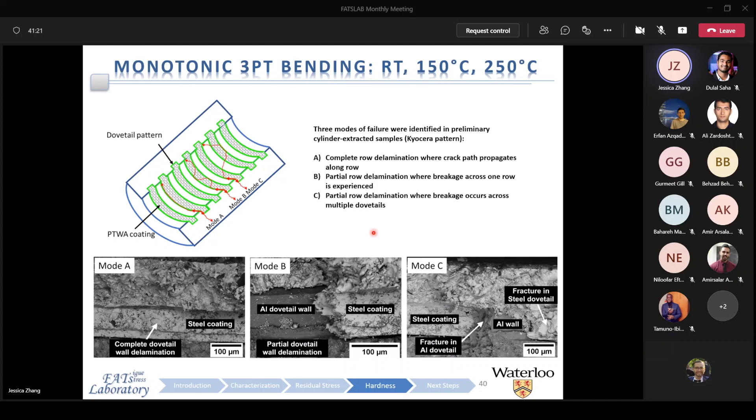Whereas mode C is delamination and breakage across multiple rows. So those were the three modes of failure that we saw pertaining, I think, to the W orientation more so. And generally, when we look at our flat samples, this is an image at room temperature. Generally, a combination of delamination and coating breakage is what we saw here, so modes B and C.

And more breakage was seen at higher temperatures. The higher temperatures also resulted in more breakage specifically at the interface; it was more prone to fracture. The failure in the H orientation modes A, B, C are not applicable, but the failure was dominated by delamination at the interface.

So while the room temperature and 100 degrees Celsius results were actually similar, the 250 degrees samples showed large degrees of separation. So I guess the difference in thermal expansion affects this particular orientation at higher temperatures a lot more. And we can actually see that.

So this is the A356H. At room temperature, the scale is a little different, but there's a little bit of separation. But at 250 degrees, it becomes quite prominent here for the A356H.

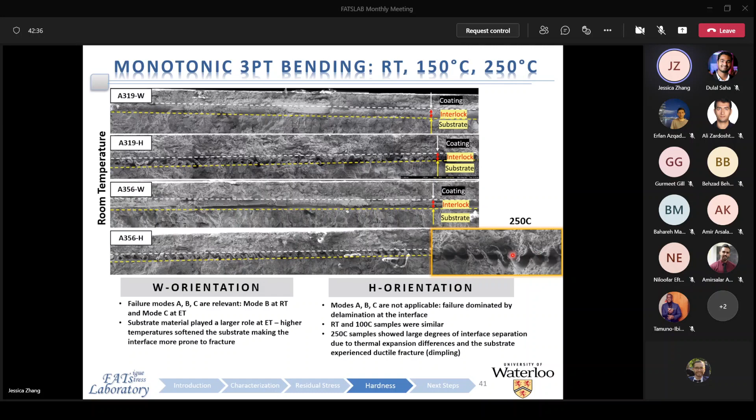Yeah, so that's all that I was going to share today. We do have a paper published that summarizes part A of our findings, that would be the microstructure portion. And we're currently working on papers for the pull test, the quasi-static bending, and then the cyclic bending. And I think Dulal is working on the fretting fatigue testing right now.

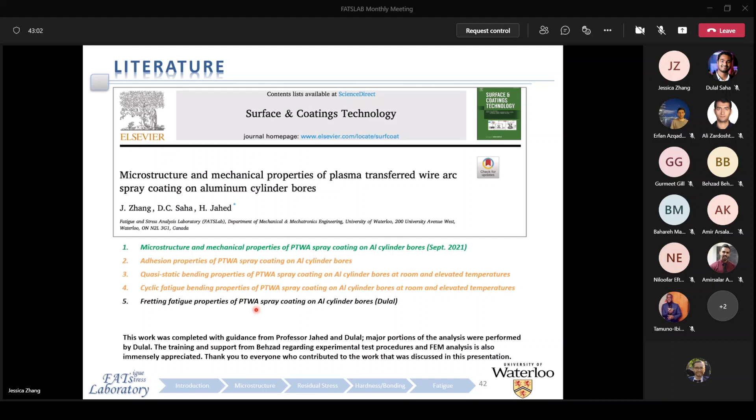Okay. Thanks for the clap. Thank you. Thank you very much, Jessica. It was a very nice and interesting presentation. I think it had a very nice flow and was also visually very appealing.

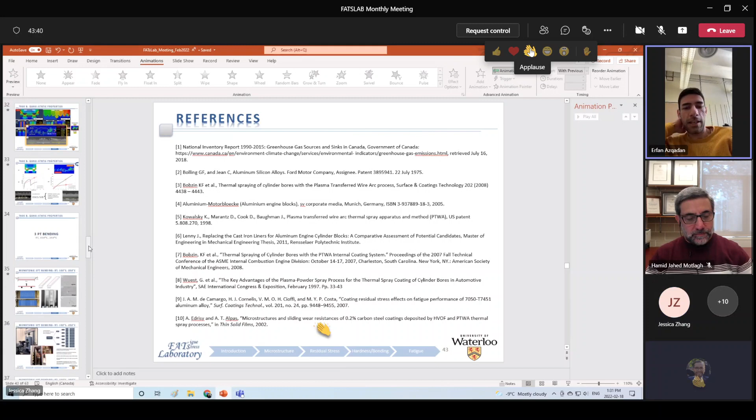Thanks. Okay, if there are any questions. I myself have a few questions, but my knowledge in coating is very narrow, so I will wait to see other questions. I might get my answers through other people's questions. So if there are any questions. Sure, I'll ask a question. Sure. Great presentation, by the way, Jessica. Very interesting. Just want to echo what Erfan said.

I have kind of a more philosophical, high-level question. It seems like a lot of the effort you have invested here is optimizing a combination of the mechanical interlocking, so the strength counteracting the delamination of the coating. And there's two parts of that: mechanical interlocking, so a mechanical attachment, and then a chemical bonding.

Can you speak to which one's more important in which situation? And maybe this might be hard to distill down to a percentage, but is there a percentage of the total bond strength that comes from the mechanical part and the chemical part? Is it simple enough to look at it like that, or is it a lot more complex?

That is a good question. I think our original goal, at least for the adhesion portion with the comparison between the finite elements and our experimental results, was to be able to subtract the mechanical interlocking that we saw in the model from the experimental results. But we also saw in our TEM study that we weren't able to identify any sort of intermetallics.

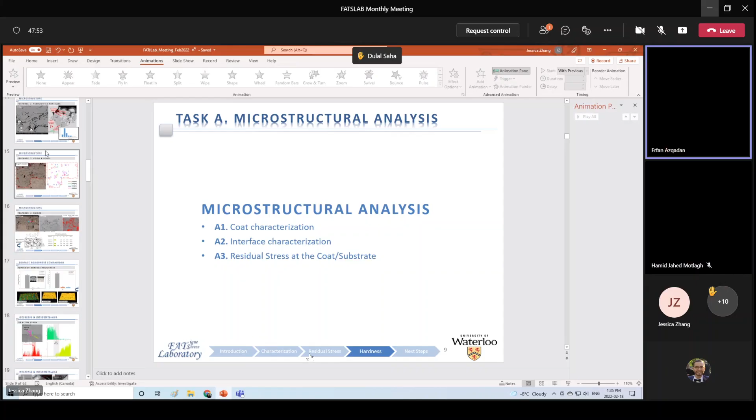Okay, let me ask one of my questions. Sure. You mentioned for one of your samples where this fracture initiates and what is the path of that. For different interlocking patterns that you have, is that different or do they show the same kind of initiation of crack and fracture? I think what I mentioned was slide number 32, around that slide. Or maybe you know better. Maybe you have that information somewhere else.

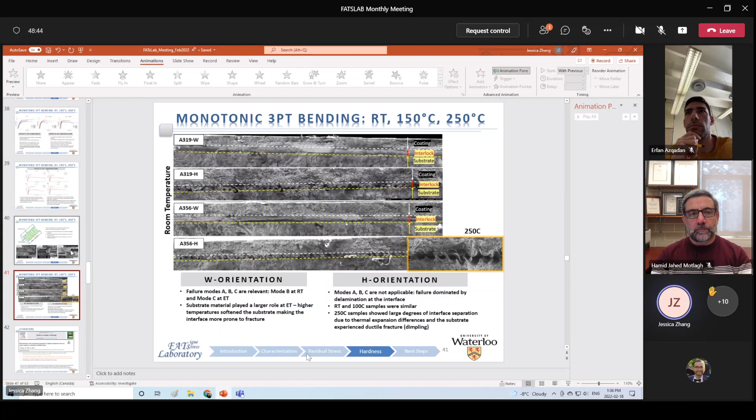Oh yeah, so this is for adhesion. I think we're talking about the fracture path for bending or adhesion. Anyways, regarding bending, I can answer that. When we did this preliminary study, all these samples were the dovetail pattern. But then when we did the second study, all of them were that wave pattern. So it's more so depending on the orientation. The failure path was very similar for both the patterns in the W orientation, whereas the H is different.

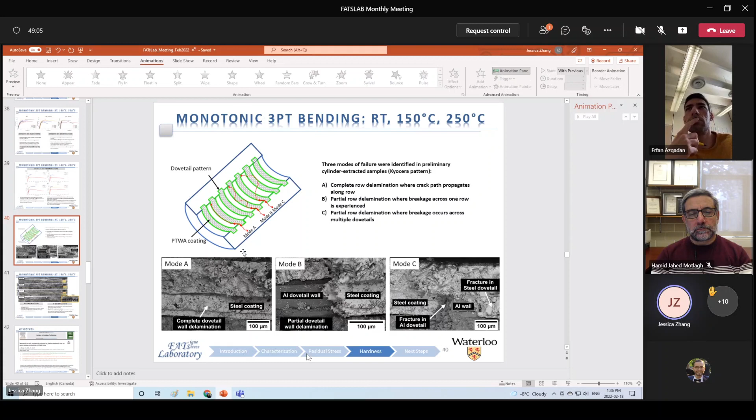One thing that we did notice in our initial tests was that there was a lot of breakage at the interface, specifically at these horizontal sidewalls, and we were really interested in seeing why that was. When Dulal looked at it using SEM, he saw a huge layer of resolidified particles that we weren't able to see because we were previously viewing it at this angle. So it really affected the amount of effective bonding that we can get in this pattern. So that would be the main difference between the two patterns. The failure path, not so much, but kind of the reason why it initiates here at the interface.

So what you mean is that the orientation is more important than the type of pattern, right? Yeah, in terms of affecting the failure mode. Yes. Okay, thank you. Because this pattern still has these kind of similar vertical sections.

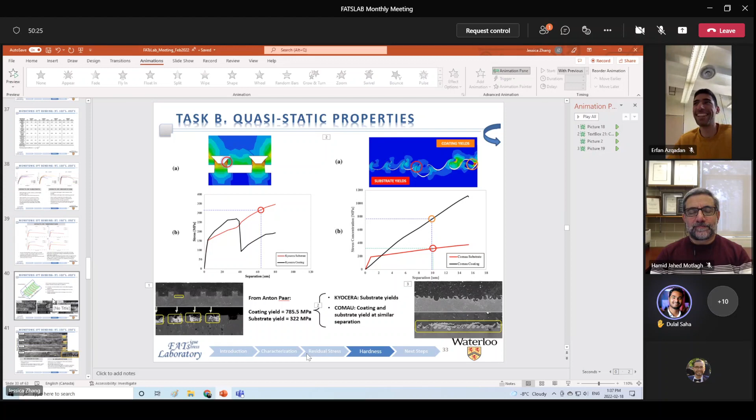Okay, it's Dulal. Actually, I have a couple of suggestions. I know quite a lot about this project; I'm involved in this project from the beginning. So just a couple of suggestions, and then I'll give some information to Andrew's question, whether the intermetallic is playing a role here.

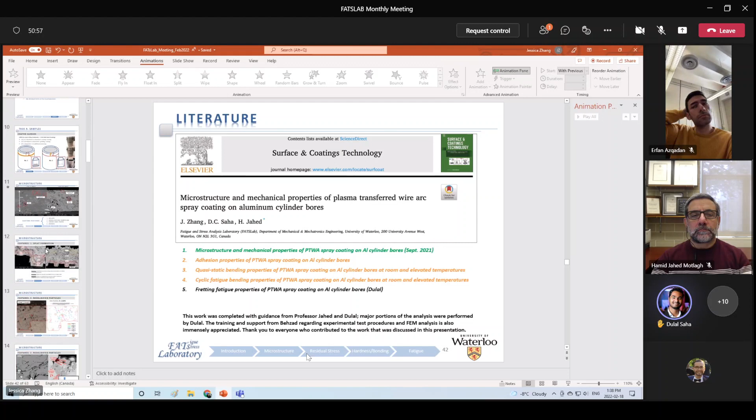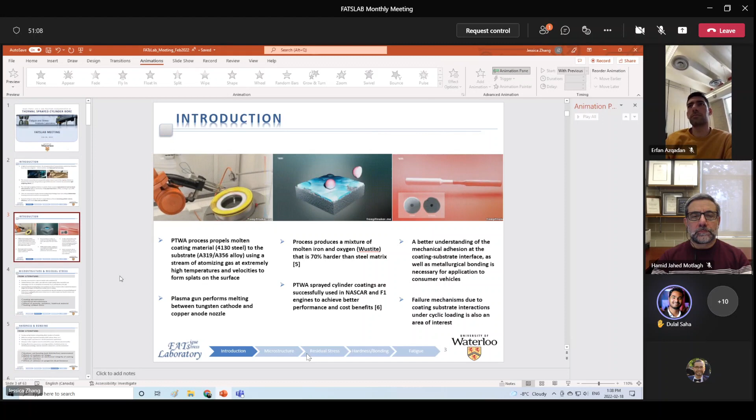For a general question, maybe in your introduction, if I'm not from this background, I'm missing what the PTWA coating deposition method is. Maybe you can just show where the interlock pattern is in the cylinder. Yes, okay. And what is the orientation of the interlock pattern? Because you are talking about W and H orientation, but if you are not in this background, then it will be hard to know what you're talking about. It's really hard to understand.

And for your microstructural part, you use a different pattern than your pull test and your flat sample. Probably you can highlight why you have done this study on this sample, and the rest on the other sample. Or, if possible, just use one kind of interface pattern to show the microstructure features, and then move into your pull test and 3-point bending test.

And also you can highlight that the oxide present in the coating is not degrading the mechanical properties of the coating, because oxide is needed in the coating and gives higher strength, like higher hardness. Some of us think if oxide is present in the coating, it's making the coating worse or degrading the coating strength, but basically not. Here oxide is needed to enhance the hardness of the coating to have better tribological properties. Okay. Sure. Yeah, that's really important to mention.

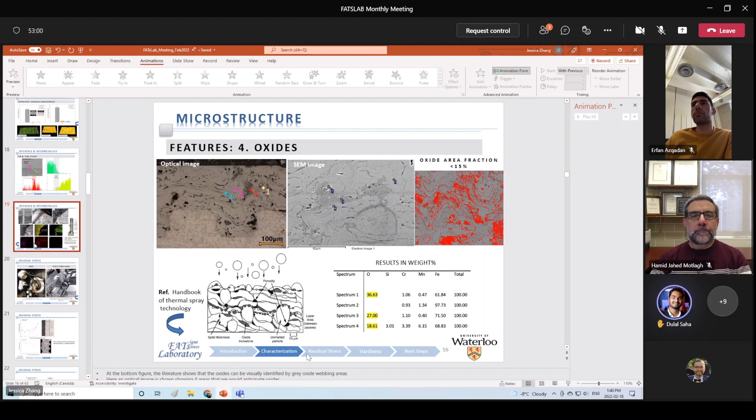I guess I didn't mention that the steel really does contribute to the strength of the coating, but it kind of does affect the failure modes that we see. Yeah, and to add on Andrew's question, there is some intermetallic present based on our discussion with our industry partner, a nano layer of intermetallic. They suspect maybe in the order of 5 nanometers. But when we initially started the TEM investigation, we didn't look into that nano level of the interface; instead of 5 nanometers, we looked at maybe 500 nanometers.

So we didn't actually find any kind of trace of intermetallic. Maybe the intermetallic layer was very much in the nanometer scale. That's one. And to identify what is the effect of the intermetallics or metallurgical bonding versus mechanical interlocking, we did the simulation, and we found the simulation result is quite matching with our experimental data, which suggests maybe by only mechanical interlocking we can have the strength we are obtaining from the full

test. And if there is any intermediate layer present, that has very minimal influence on the total strength of the coating. But obviously it is present. We can say there will obviously be a nano layer of intermetallic compound at the interface. Yeah.

Yeah, and I would also add that during our adhesion study, since we were able to view our samples from the fracture surface, we can also see the surface of the coating. And we found a kind of strange webbed texture, and Dulal did a little bit of a study on that to see if it does have the potential to be an intermetallic, though we're not so confident about that, so we cannot claim it as of yet. So. Okay, don't worry about it.

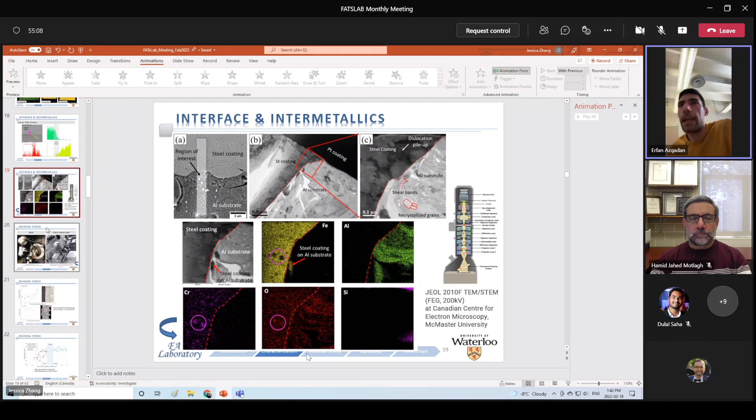Okay, I also have another question. Can you go to your slide 38? Yeah, here for this red one, A319W, between 150 and 250, it seems that's the only one that dramatically decreases its mechanical properties, if I'm not wrong. It seems that it is affected by the temperature a lot compared to the other one. Is there any explanation for that? Did you find anything like why that happens?

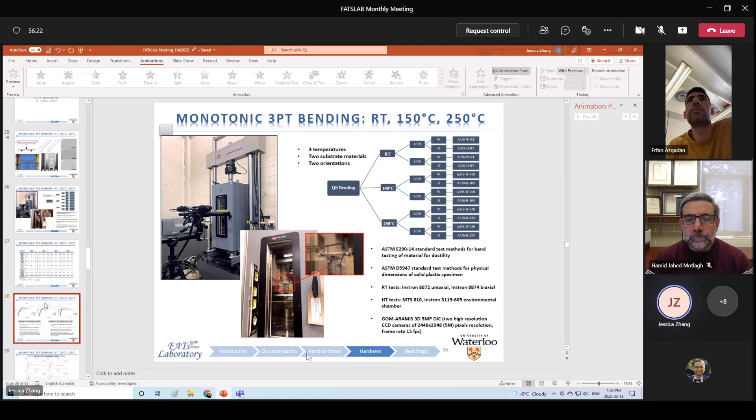We actually did see in some properties that the trends at 150 didn't really follow successively from room temperature, 150 to 250, but we are not quite sure yet why. We are also taking a look at the differences between the testing. As you see, we unfortunately had to use different test machines: for room temperature we used the 2 Instrons, and for the higher temperatures we used MTS for these 2. So I guess the trends, although you've noticed that the 150 doesn't quite fall in place between the room temperature and the 250. Yeah, that's also correct.

And the system is only aluminum and iron, right? Okay. So I don't think there is any intermetallic in this system that might be, for example, stable at 150 and not stable at 250. Any intermetallics would be stable until like 600. So, yeah, 250 is quite low. Thank you.

Thanks, Jessica, for the very nice presentation. May I have some questions and comments? Sure. First, some editorial or formatting comments. I'm sure that you will add that in your final version, but anyways, an outline up front and a conclusion slide toward the end of your presentation might be useful or maybe necessary. And the flow map at the bottom of your slide does not match with the slide subject. I'm sure that you will fix that in your final version anyways.

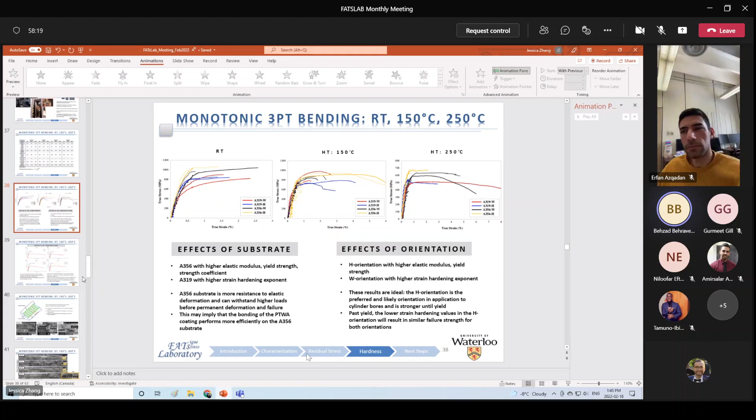Apart from those comments, my other comment is that I didn't see too much information about the literature in your presentation. In slides 4 to 6, I saw some statements, but you didn't go through those. I think the audience or your examiners would expect you to show that you are aware of what has been done in the literature and what conclusions they have made through their research. So you can present those in your earlier slides, or where you present your own results regarding the microstructure, intermetallics, residual stress, or other things, you can just point out what's available in the literature regarding those topics. I'm just saying that I couldn't find that information to the extent that I was expecting to see.

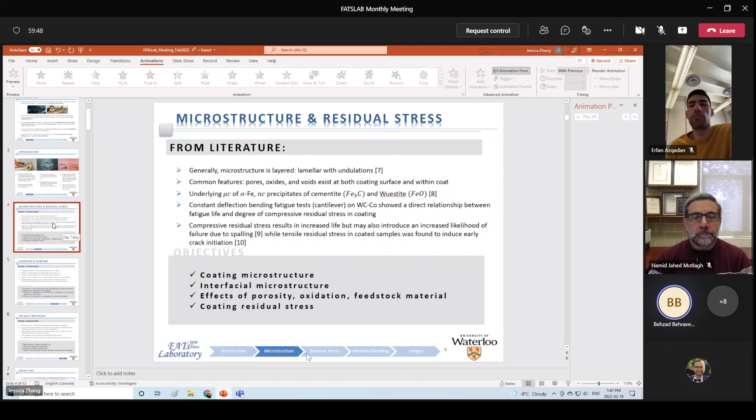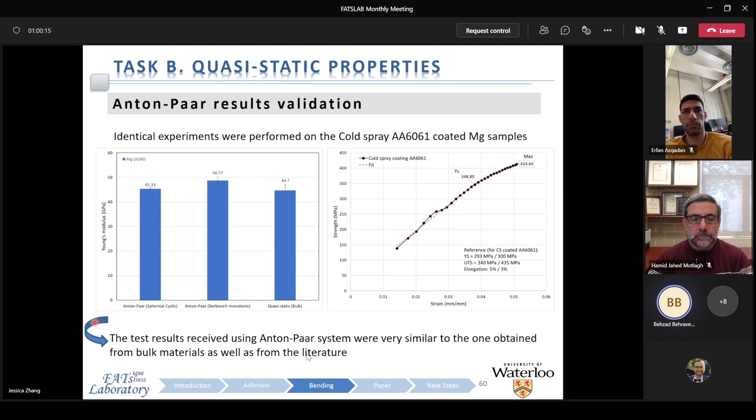And the other comment is that in your presentation, I couldn't understand how the Anton Paar equipment works for the quasi-static properties of the coating. But could not this be? So yeah. So this was for obtaining the quasi-static property of the coating only, right? Not the interlocking between the coating and the substrate. No, it was just used for the properties as well as the hardness, using different indenters.

Okay, so the indentation, like the nano indentation equipment that we have here at UW, couldn't that be an alternative for doing this experiment? Yeah, so we did try that. It was a very long time ago. I don't remember his name, but he mainly works with the cyclic indentation machine that we have here, and he was coming up with a way to transfer the results to stress strain curves.

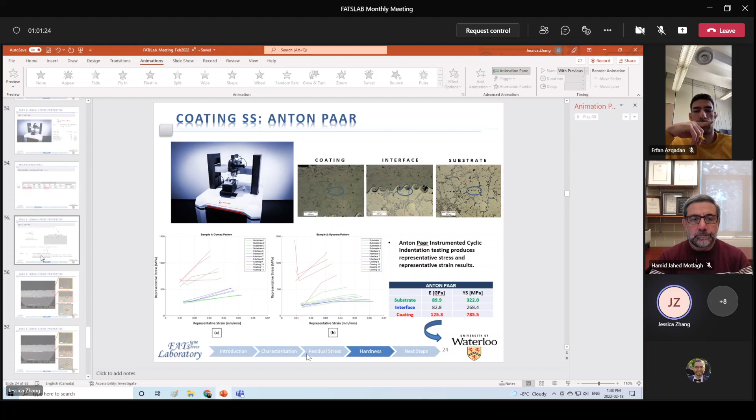But while we were working together, it was kind of like a development process, and we both had codes for it, and we were trying it out. But the professor was sending off these samples to Anton Paar that had a sophisticated method in place already, so that's why we did this. But we did try on our own to implement. I think I have a couple slides. So the equation, we tried to implement something similar to read our data.

Okay, I see. So I think it's Abdul Basit that you worked with. Anyway, one very basic question, maybe. I'm sorry if that is very basic, but to my understanding, cylinder bore, which is the application of what you're doing in this research, is under compressive stress from the piston ring and from the gas combustion that is happening inside the cylinder. So why is adhesion or interlocking under tensile load of your interest, while we know that this component is going to be under compressive?

Yeah, I think we're more so interested at this point. Of course, that type of testing is also necessary, and we also have fretting testing. We're mostly interested in the bond strength, kind of putting a specification on that for the coating and the various variables that we can change, like the materials and the interface pattern. So yes, a little bit removed from the particular application. It's more so just finding the bond strength of the coating. Okay.

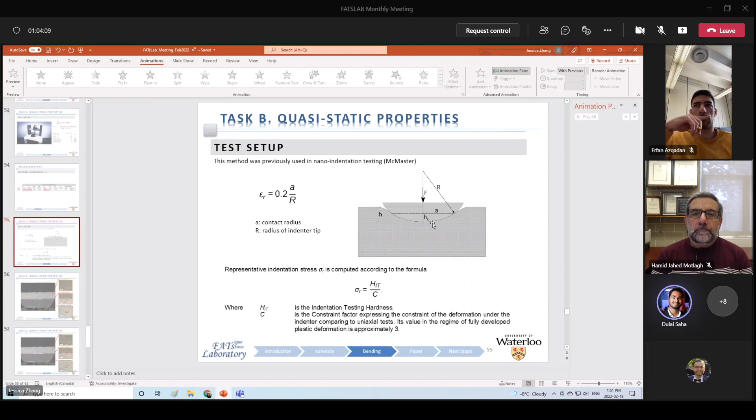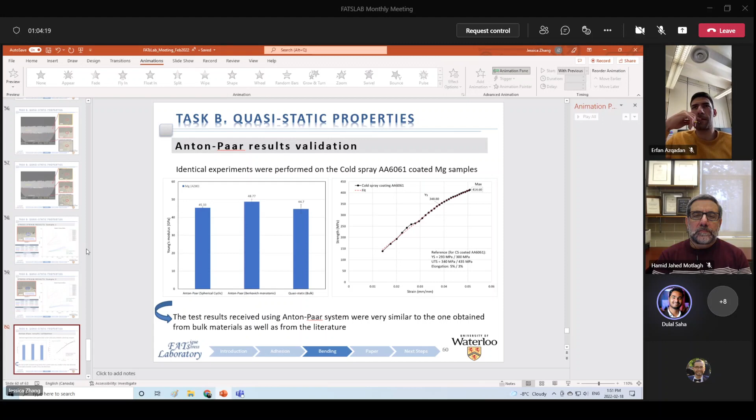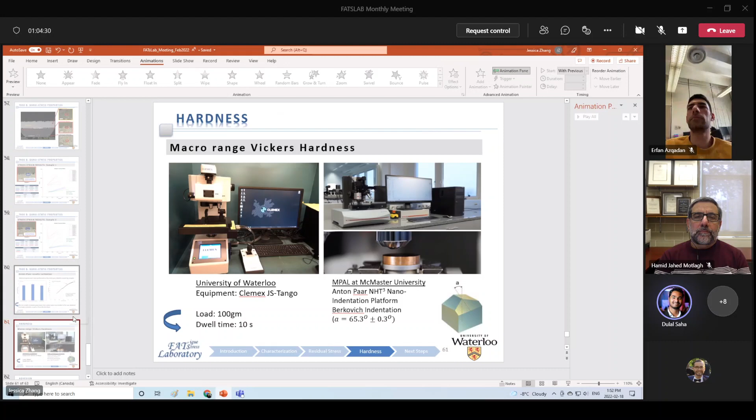I think Dulal has a question or some clarification. Yeah, just a clarification. So about this Anton Paar result, how it works: it uses a spherical indenter, a cyclic spherical indenter with a very low load, like 20 micronewton, and it does cyclic indentation on the same spot to determine the impression of the amount of material under that spherical indenter. And then using some empirical equation, they estimate the strength, mostly the elastic and plastic deformation, mostly the plastic deformation within the volume of the material.

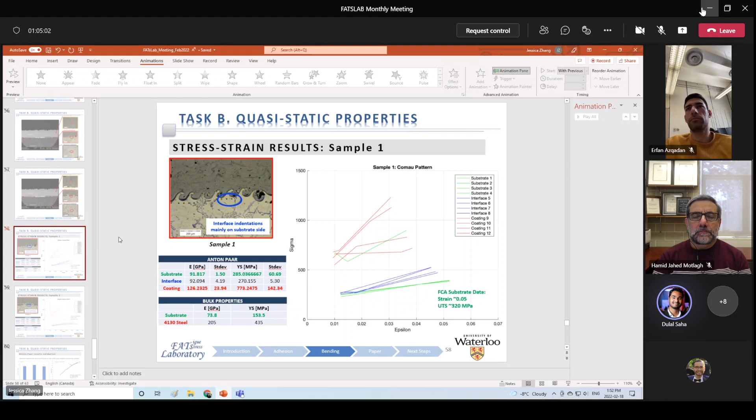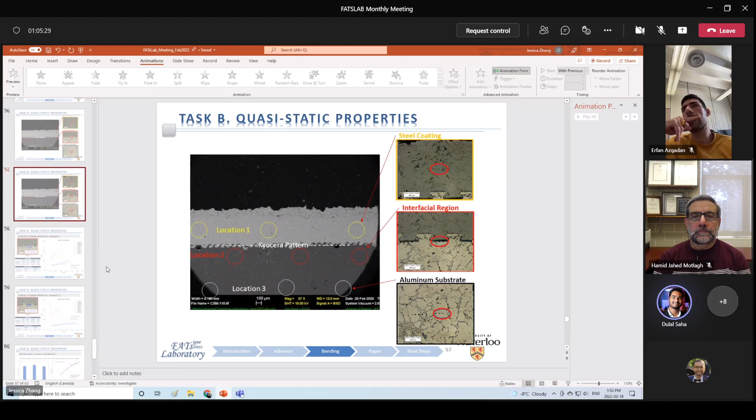And then it can produce a representative stress strain curve, which represents the local property of that material. Okay, so as our coating thickness is around 200 micron, we cannot produce any kind of micron size sample or sub-size sample for real tensile testing. That's why, in order to have properties like yield strength and the elastic modulus of the coating, we did cyclic indentation here. And before, we matched this elastic modulus for the coating and substrate with other material, like on the magnesium substrate here.

In this slide I'm showing the Anton Paar spherical cyclic indentation modulus of elasticity for, I think, AZ80 material, and then the Berkovich indenter, that is the triangular nano indenter, and then the bulk sample. So we are seeing a similar elastic modulus using this cyclic spherical indenter. That's why we used this method to determine the Young's modulus, mostly on the coating, because that Young's modulus is required to estimate the properties of the coating that Jessica used for, I think, Abaqus simulation and other calculations as well.

So this curve here is like the representative of the stress strain curve. You cannot compare it with the bulk sample stress strain curve, but it will give you some representative. I cannot tell how the representative stress strain curve is different from the real tensile test, but you cannot compare the values you have after plastic deformation. Within the elastic region, though, you can have a better estimate of the property.

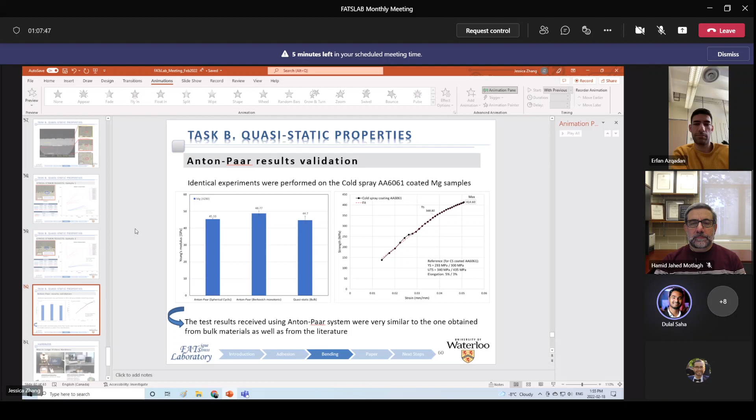There is no other way actually we can estimate the coating property, because the coating was only maybe 200 microns thick, and there was a lot of porosity and other defects in the coating. It's very brittle, so we cannot load it in any other way to estimate the properties of the coating. Okay, thank you, Dulal, for these clarifications.

And as a follow-up on the editorial comments that Behzad provided, I think the presentation might benefit from one slide describing the process itself. I know that you did a lot of things and you don't have enough time to present all of them. But for someone like me, I learned about this process throughout the presentation. It was in the middle of the presentation that I found out, for example, there is this interlocking effect, where I was thinking about more metallurgical bonding. But I think one slide might be nice to have.

Oh yes, for sure. The literature needs to be a little bit more clear, as well as the process, and for sure showing the work that's been done to determine these interlocking patterns, which I've realized I missed. But the flow is very nice, and everything was very nice.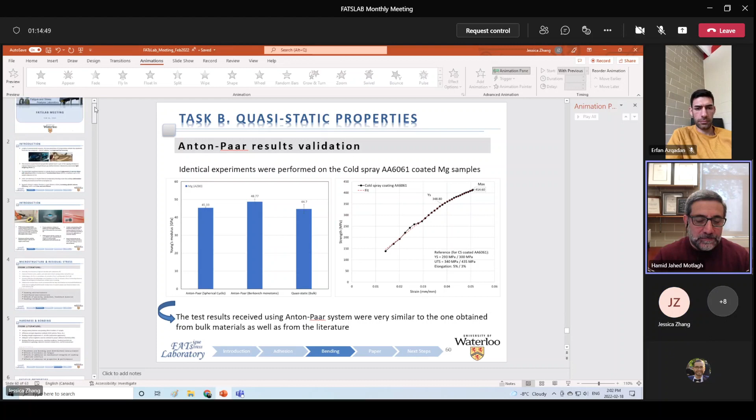And I'm not sure if we have any images. I mean, this material that we received, the coating that we received, is proprietary information of Kamau Industry, which is a side industry working with Ford and Stellantis and other companies. Even the details of the coating are not revealed, but I'm not sure if there is any.

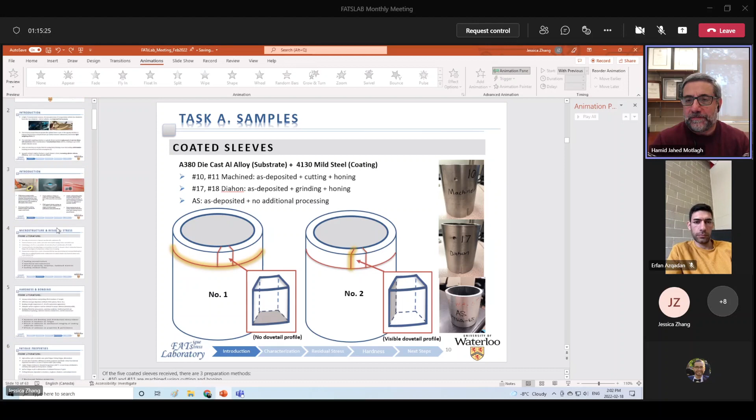You had some images or videos or animations showing the coating, if you could find one on the net. The first one shows this method in general; I'm not sure if it's the cylinder bore. Okay. The second one is a good animation of what's going on. I'm not sure what the third one is. Oh, it's just comparing, this one is coated and this one is not, and you can see the wear resistance. Kind of just selling the product, I guess. Yeah. But yeah, I agree.

So I can add images from literature. Yeah, of course, from open sources, from literature. It doesn't have to be your own work. It's just for reference. Bringing everybody up to speed on what the problem is, what the technology is, why it's being done. It's a big part of what is known as circular economy.

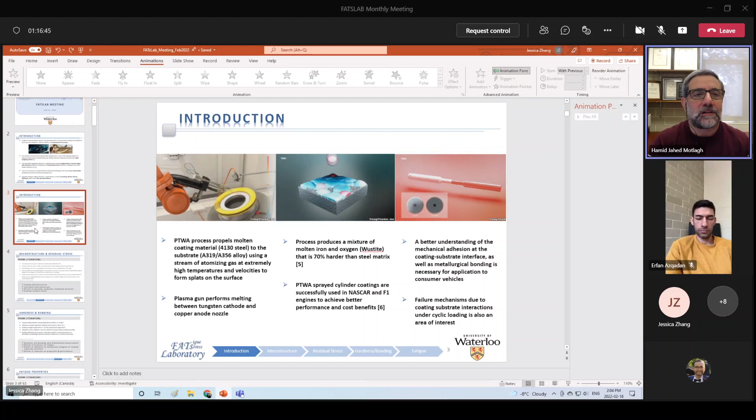So any of these cylinders are damaged. We have many old cars in many parts of the world, not so much in North America, but other parts. So instead of making a new cylinder, you just take that cylinder, use 80% of that material, and recoat the inner part of the cylinder because the rest of it is good, and then use it. This is much bigger in Europe than in North America. The mindset in North America is not remanufacturing or repair; it's just throw it away, buy a new one.

But it's coming big time in terms of sustainability, energy resources, and carbon footprint for that matter. So it's something very interesting that all the companies are now looking into. Of course, we are moving toward electric cars, but similar things would happen there as well. For many parts of the world, this is still very much relevant and useful.

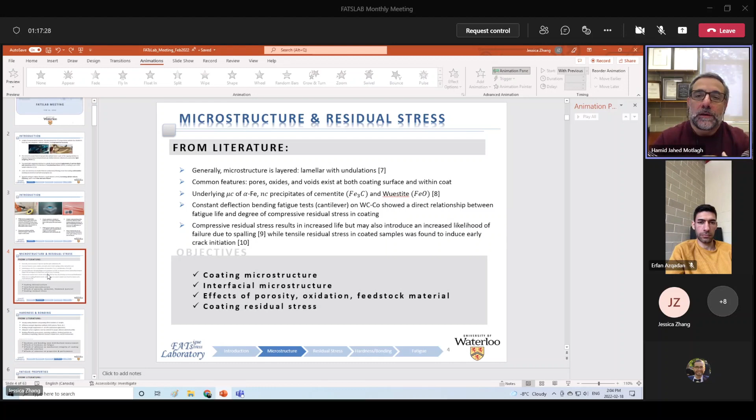What she was trying to do here was, first of all, better understand the adhesion mechanism. Despite what you would expect, that there would be metallurgical bonding because the temperatures are pretty high in this thermal spray, it turned out to be mechanical interlocking. That's why they produce these surface treatments first, to create this pattern mainly for mechanical interlocking. The different wave shape and dovetail shape are toward that.

We do believe that cold spray will do a better job here, but unfortunately we have to prove it first. But this was the first step. It shed a great light on what's going on in this thermal spray, what the characteristics are, and what the bonding mechanisms actually are. She also talked about the quasi-static, and the fatigue part has pretty interesting results, which shed a lot of light on what's going on and how the process can be optimized.

As you can see, the amount of defects is really high in this process, but this is what is currently being done. I think Ford has most of their engines using this method, this technology, and other companies are following suit. So it's becoming widely used in the automotive industry.

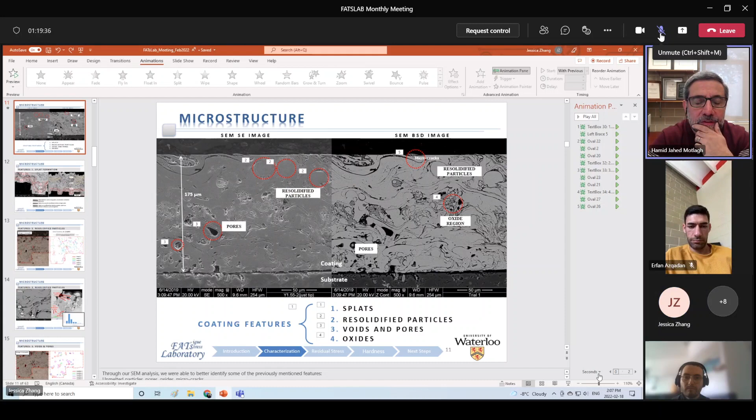Very good presentation. I think you went over the most important things as far as characterization is concerned. You've got to time it well for the seminar you will have. You have half an hour. You will be selective, of course, because they will read your thesis in detail. We'll get there closer to the seminar day. Very well done. Thank you.

Great job, Jessica. Yeah, great job. Okay, I think. Oh, sure. Oh, sorry, I'm not sharing anymore.